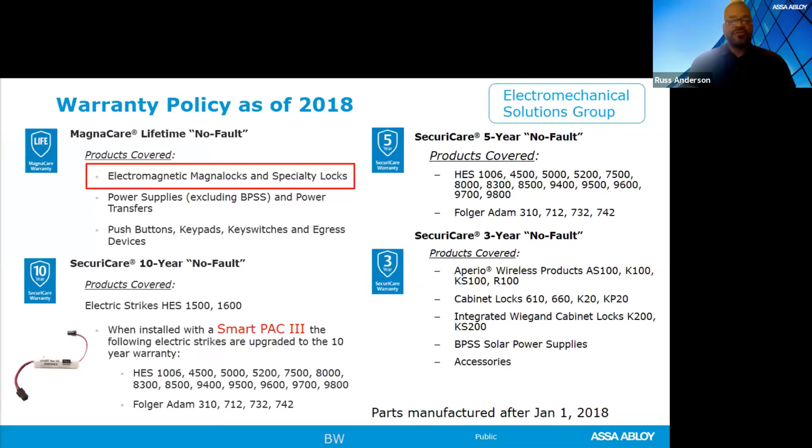So next thing is safety, safety, safety, all right? You have to be safe. Regardless of where you are in this industry - you could be an architect, project manager, technician, it really doesn't matter - you need to do your risk mitigation before you go out to the field or take part in any activity, because you want to make sure that you are going home every day the same way that you came in. So check for falls, check for exposed wires. All these things are very, very important. Now, social distancing - very important to make sure you're safe and smart when you're out and about.

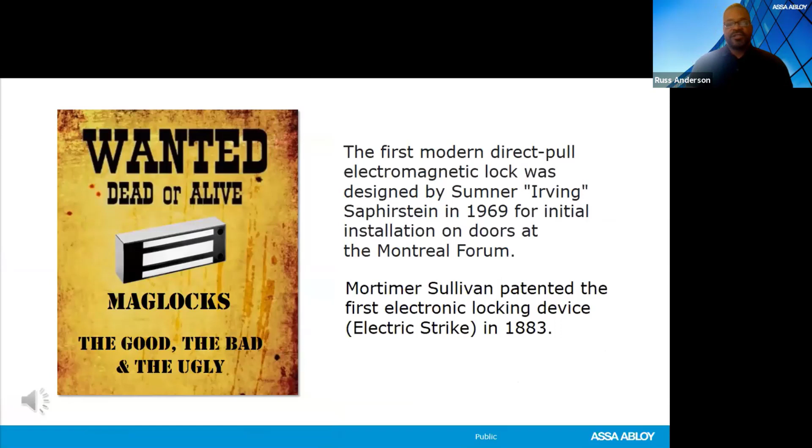All right, so let's go ahead. We've already done some of our housekeeping here. So we're going to talk a little bit about magnetic locks. First things - maglocks have been around a long time. A lot of people don't realize that. They've been around since 1969. A long time. And then it was patented in 1883, the first electric locking device, the electric strike. So access control has been around quite a bit. But the thing about these particular products - if you don't get the training, bad things happen. And that's one of the biggest conflicts with magnetic locks: not getting the training, putting them in the wrong place, not taking the time to put a good quality installation together. So it's so important, okay? So be aware of that. There is training available for you so you can avoid these things, all right?

So today's agenda, what we're going to be talking about - we already did our welcome. We're going to talk a little bit about code because maglocks are very code driven. Some of the maglocks that fit your need, maglock application, then some of the supports that are available to you. So I'm telling you, we've got a power-packed hour. And if you have any questions, please, especially with magnetic locks, populate it in the chat. There are no bad questions, okay? And we want to make sure you are smarter in the next 50 minutes than you are right now. That's our goal. Plus you have a good time.

All right, so let's jump into codes. That's the biggest deal when it comes to magnetic locks, or a lot of the demystification we have to do out in the field when it comes to magnetic locks, right?

People find ambiguity when it comes to building codes, fire codes, electric codes, and life safety codes - which codes are adopted, which codes apply. There's a myth that maglocks are banned unless there's a written amendment or policy in that local municipality that amends the current code. There's nothing that says that. Not in IBC, not in NFPA, not in IFC. You just have to adhere to certain code requirements. Now the AHJ can write a local policy in addition to restrict magnetic lock use, but in the base codes you don't see that kind of thing. We're going to talk a little bit about that.

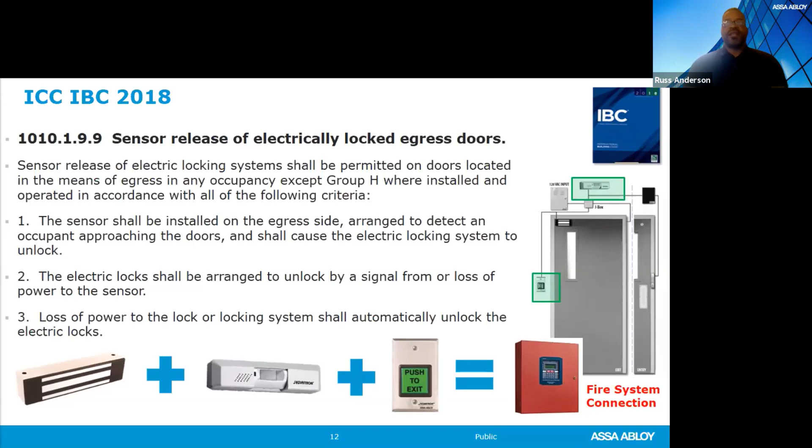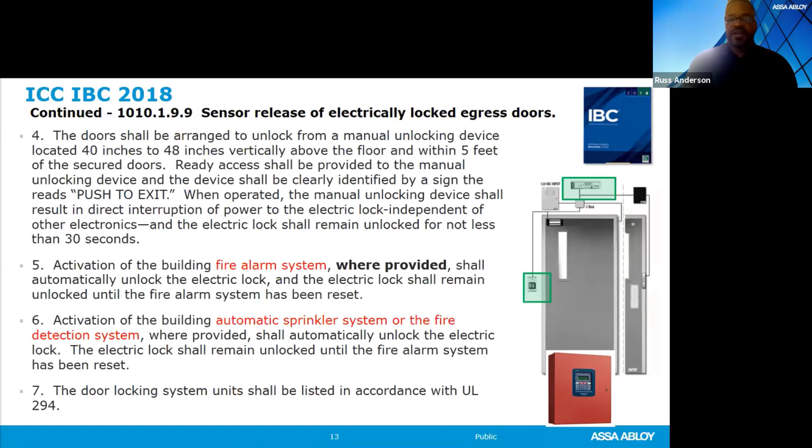Absolutely, you can add a switch to many bars or many of those pre-existing devices, as long as they are able to be electrified to drop power to the Maglock, as long as you fall under that specific code. So just be aware of that.

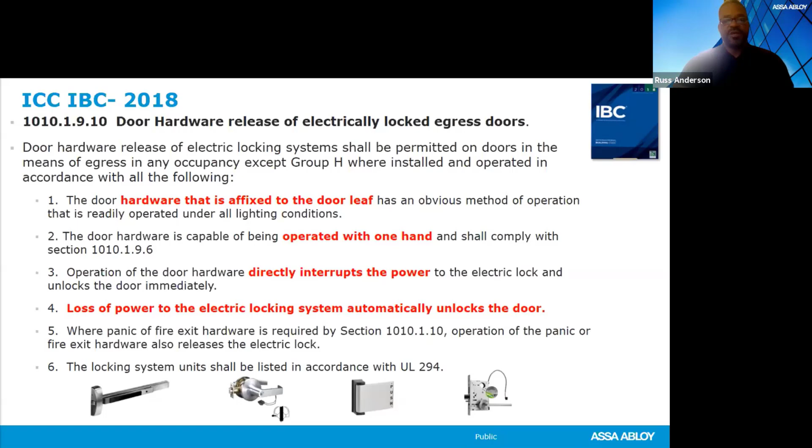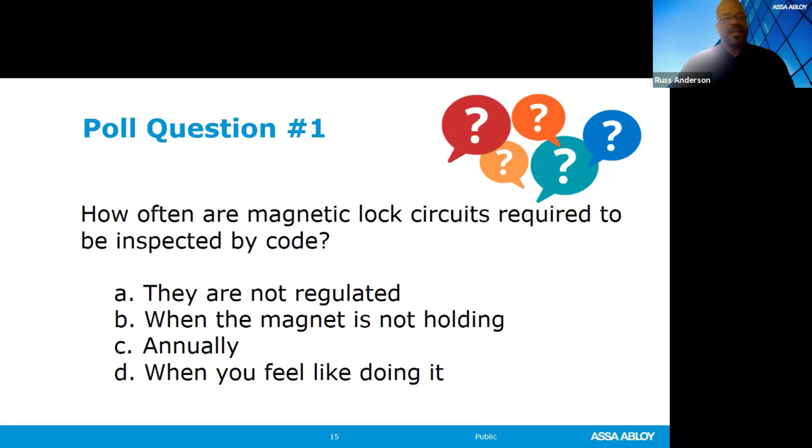Okay, so that's very important to know when you install a magnetic lock. Annually is a very important number to remember. Okay, and that's right out of the code, so we're not making anything up here. All right, so let's keep on going. That's good information, thank you guys for participating, appreciate that, makes my job a lot easier. So let's keep on going here.

And we're going to talk a little bit about some of the maglocks that fit your needs. That's so important to know because we pose these questions all the time. Where should I use a magnetic lock? And most people will say, well, it's the last thing that I choose. Unless there's no other solution, I go with a magnetic lock. Now, there are openings that are inherently a little bit better for magnetic locks versus other solutions, okay?

So we have aluminum storefront. Absolutely can use a magnetic lock, especially those double active leaves. They are very hard to secure, okay? So especially if you want them both actively controlled independently.

Glass openings, another opportunity for our magnetic locks, okay? Some of those places where it's just gonna be difficult, or just maybe your skill level, your technician couldn't core drill that door to get that power. Look at all that glass on some of the bottom doors. You're not going to be, it's going to be difficult. So there are some specialty openings out there where you can use magnetic locks.

So we're going to talk about some of those openings, but it's important to know where and when to use magnetic locks. That's the important thing, okay? Where and when to use magnetic lock, and it's based off certain criteria here. All right, so let's advance here.

First and foremost is holding strength. There are all different types of magnetic locks with different types of holding strengths. We've got from 200 pounds all the way up to 1,800 pounds. That is a lot of holding strength here.

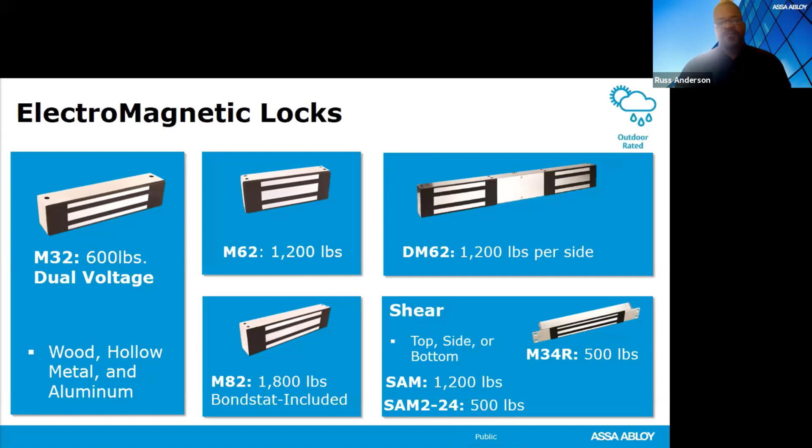And then we have some of our specialty locks, like our shear locks that you can install on top or bottom, and our M34R, a 500 pound recess magnetic lock. So there are a lot of solutions out there, but these are not interchangeable - there are certain solutions for certain magnetic locks. We're going to show you some of these so everybody knows, because we see this a lot: putting a magnetic lock in the wrong opening so it's not doing exactly what it's supposed to, because it's made for a certain solution.

So we also have our bracketed mounted magnetic locks. Some of these magnetic locks can be a little bit heavy, so this makes installation a little bit easier. You install the bracket - there's a lot of adjustability to it, so you can line up your magnetic lock with your strike plate a lot easier. It still has all the same advantages of your direct mounted mag locks.

This one actually has LED door position switches available for in-swing and out-swing doors - perfect for high traffic, high security, fail-safe, delayed egress systems. We're going to talk about delayed egress - that's a very big deal nowadays. So if you want something with a little more flexibility, your bracketed mounted mag locks are definitely the way to go.

Basically, it's a bracket that you put onto the gate - doesn't matter if it's round, square, whatever the case may be. It's boltable and weldable, and you can use the 62FG and work it in conjunction with that, so it works really well. You really want to start thinking about perimeter security - it is an emerging market. Stopping people from getting onto the perimeter of the property versus at the door is a very big deal now, so definitely want to consider those things.

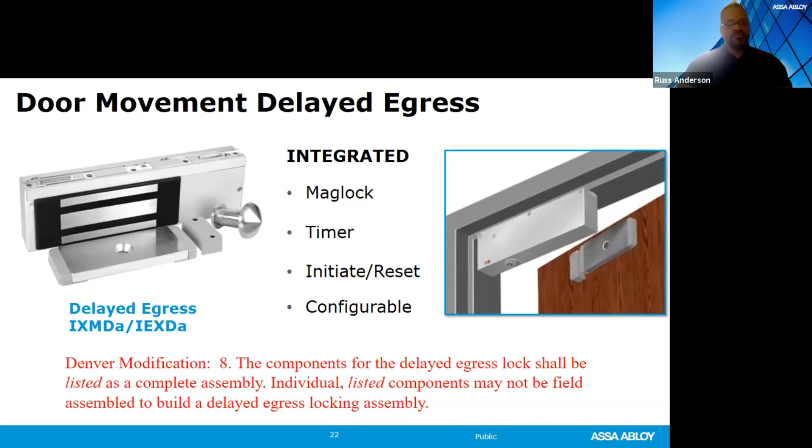But one more delayed egress solution is coming soon. The IXMDa has a bit more of an industrial look, but Assa Abloy takes the time to add aesthetics, a good looking product so it doesn't detract from the opening. So hopefully soon we'll be releasing the DEM 680E Eco Mag.

This is a great, good-looking solution for hospitals, elderly care, and psychiatric detention. Loss prevention is another good place - you're going to see that in retail stores on doors that shouldn't be used, where the customer should be using the main entryway. So if somebody's hitting those back doors, that's not a good thing. With delayed egress, you can put some type of initiate, buzzer, or LED so the asset protection people can come see what's going on with that particular opening. It looks nice, adds aesthetics, doesn't detract from the opening. So it should be coming soon - we'll let you know as soon as it's available.

We also have some additional EcoMag products to talk about. There's a whole line of them - the Securitron M680E BD, and a whole bunch of different acronyms. I won't go into all of it, but the cool thing is these magnetic locks, when the door is propped open, the magnetic lock drops down to almost 20 milliamps, so it's not using the same amount of power. Typically most mag locks are about 300 milliamps worth of power. It's a huge savings when you're able to have the magnetic lock go to sleep until it's needed.

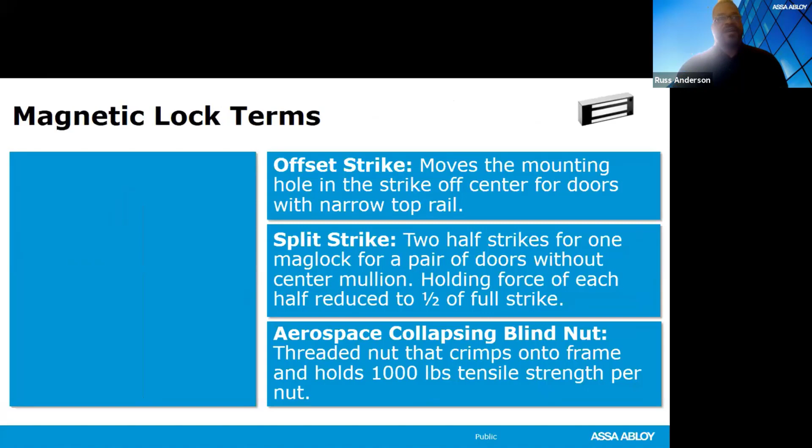Okay, so some of the other additional things when it comes to magnetic locks. Some of the terms associated with them: offset strikes. That moves the mounting holes off center so you can basically make it up in a more appropriate manner when you're dealing with those weird frames and doors.

You also have the split strike, so if you want to control a pair of doors with one magnetic lock. That's a very common thing out there. You can put a 1,200 pound mag lock in the middle of the door, especially ones without the mullion in it, and you're able to control those leafs. You just release both of them at the same time.

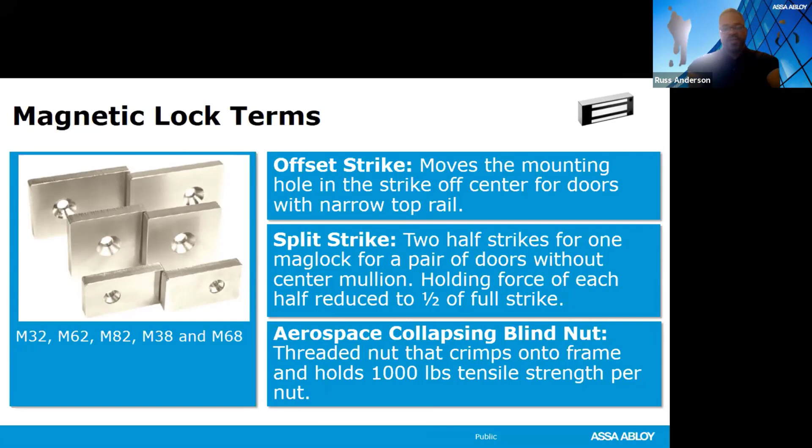And then there's something unique to us, the aerospace collapsing blind nut, okay? Threaded, crimped into the frame, 1,000 pounds of tensile strength per nut. Okay, that's a big deal.

And a lot of our competitors use self-tapping screws. Be aware of that. Those magnetic locks typically are taking an impact because you'll be surprised how many people are using the magnetic lock as a door stop. It hits that magnetic lock with that self-tapping screw, it's going to come out. You just don't want that phone call: hey, a magnetic lock came out of the frame and hit little Johnny on the head.

So you don't have to worry about this with these. It's 1,000 pounds at each attachment point. That's huge, you can hang from it and it's not going anywhere. So absolutely, you can get a bag of these. They come with all of our Securitron magnetic locks. Use them on any type of install, it's definitely going to help you out.

All right. There you go. Thank you, Roger.

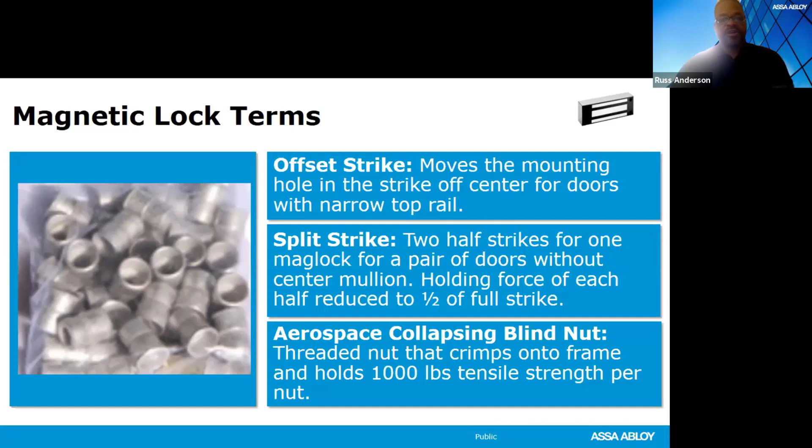All right, BondStat, we said we're going to talk about this here. So it basically notifies your access control system or your alarm system that your door has accurately secured. So when it's completely mated, you don't have any problems.

You've got the armature plate here, completely mated with these strips here, and you're good to go. But if it goes cockeyed or off center, it has a normally open contact to let you know there's something going on with the door. So absolutely, let me know, okay?

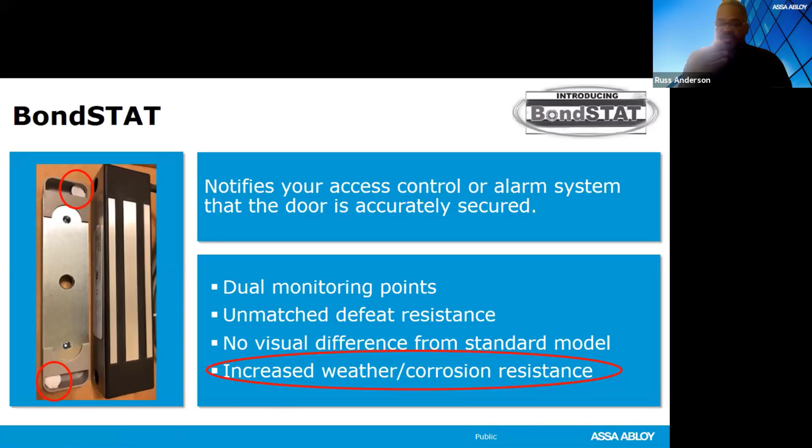Increased weather resistance, corrosion proof, it has a film sprayed on it. There's really no reason why a Securitron mag lock should not last 20 years easy. Just got to maintain it, keep it clean, and you're good to go.

And then we have a couple of other additional features. Again, you have to go back to code. The SB-MXD initiate device allows you to initiate any signal for delayed egress. So if you already got a magnetic lock on the door, you've got a push device or dual sense bar or something like that with a switch in it, and activate that initiate. Just be aware, make sure you're able to use multiple different components in your particular city or municipality, or if it requires that one all-in-one component.

Then we have the energy absorbing bolt, okay? Because again, you hear that click. It absorbs that impact, thank you Roger, appreciate that. Absorbs that impact so it extends the life of that solution. Very easy product to install, you definitely want to put these on all magnetically locked doors.

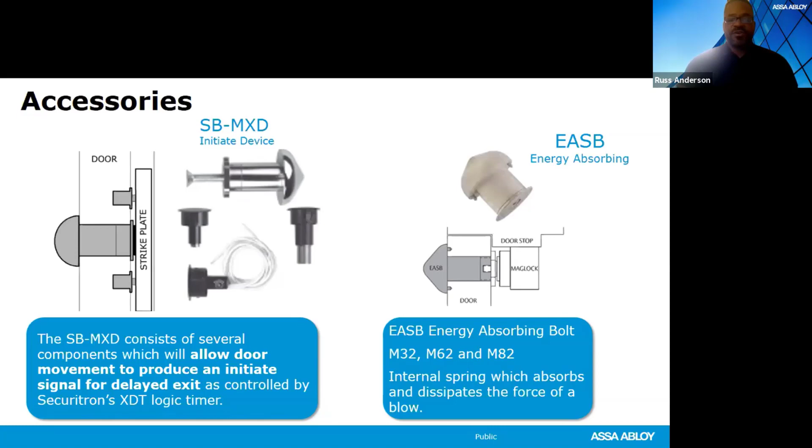All right, so if you've not installed a magnetic lock and you don't know what tools you need, this is the box for you. It's called the IK Installation Kit. It has everything you need to install your magnetic lock: drill guides, blind nuts, washers, everything you could possibly need. Plus, it even has the cool cocking tool that you can just drill the hole and pop, and then you are able to put your blind nut in. It's a lot easier than using the crescent wrench and a box wrench and having it collapse down. So that's definitely a recommendation for me to you to get that tool. You can get that from us.

And then here's some of the solutions for magnetic locks. Glass doors. Anybody done a glass door yet? Done access control on a glass door? Go ahead and raise your hand if you've done that.

I know Roger has, right? Okay, Kevin, okay. So there's a few of you out there.

Glass doors are not going anywhere, I can tell you that right now. They're gonna get more sophisticated, more intelligent, and they're gonna say, hey, just leave it to the door guys to figure out how to secure this. So we've got solutions, and magnetic locks are inherently a good solution for all glass openings.

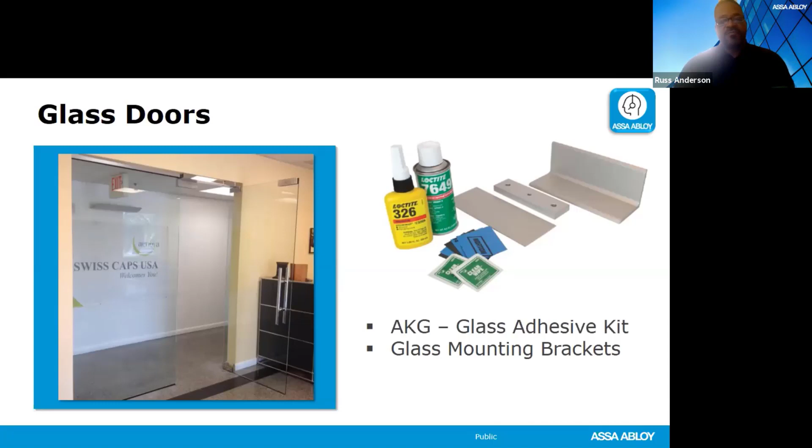But let's talk about some of the other frames that are out there, and why it's important to do that site survey. That's because there can be multiple different types of openings in your building, and in each one of those openings could be aluminum storefront, could be 18 gauge knockdown frame, could be glass, could be wood. There's different mounting brackets for magnetic locks depending on what type of frame you're dealing with. So that's very, very important to take a good look at that.

You need to have that 2.5 inches of flat mounting space to ensure that your magnetic lock is anchored correctly. If your magnetic lock is not anchored correctly, there's a possibility for liability. So we want to make sure you have this information.

Katie just populated it into the chat, that's a nice little cheat sheet. If you're looking at aluminum storefront, hollow metal, concrete, all the different frames that are out there, we've got a nice little cheat sheet. So click that link, download that to your electronic device. I'm telling you, it's going to save you some heartache.

And this leads us to our next polling question here. What percentage of technicians go out to the job site without the correct mounting brackets? You'll be surprised, this is our own poll. So what do you think? How often do you think that happens?

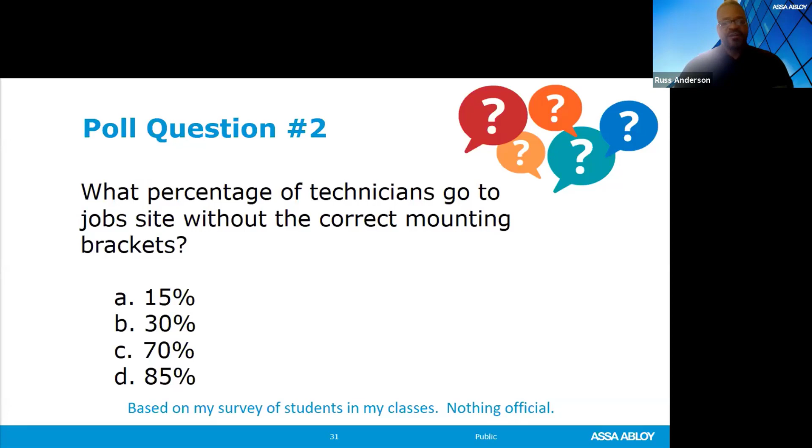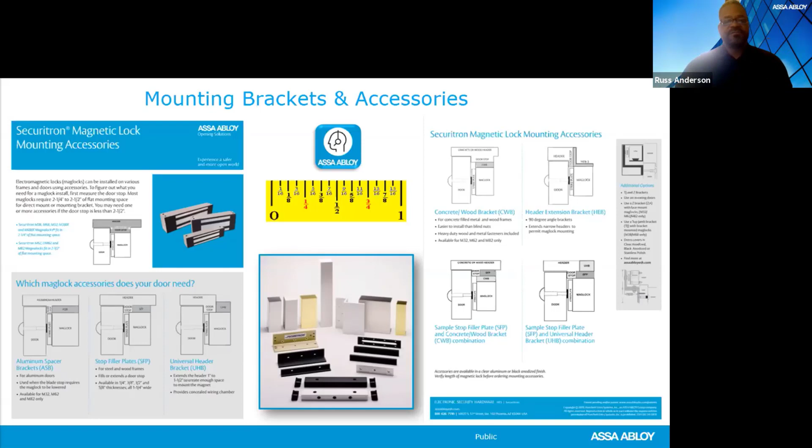Again, like we said, 2.5 inches of flat mounting space is so important for proper anchoring. But then there are some frames out there where you're just not going to be able to create that 2.5 inches of flat mounting space. So your TJ bracket and your Z bracket is a go-to. You can face mount your magnetic lock if it's bracketed, absolutely no problem, or you can do a direct mounted mag lock on the secure side of your door.

It's not the most attractive install, but it works, and you'd be surprised how often you can go to this. I've seen this on multiple different solutions. So you can always go with that TJ bracket or Z bracket, all right?

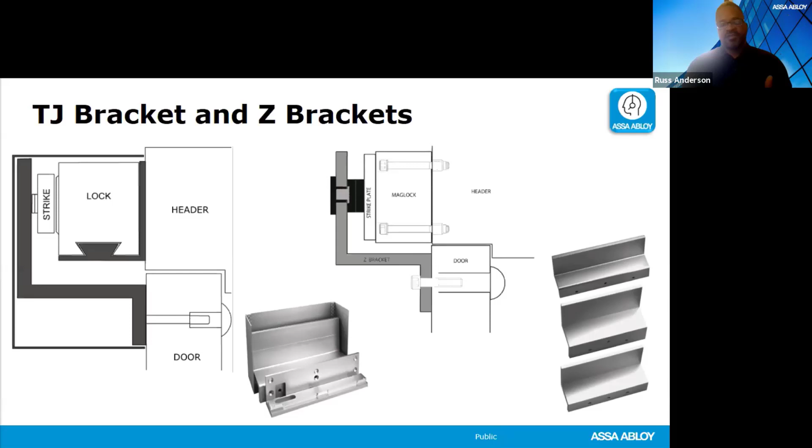All right, let's take a look at some of the magnetic lock applications. The important thing to consider when you're looking at application is you want to find the right solution for your opening. Consider function, codes, surroundings, existing conditions, and some of the restrictions you may have to adhere to, like code or when you're actually able to do the installation.

So pay attention to the opening, the frame type, existing hardware that's already on the opening, that's an important thing to consider, and then familiarity with the electronic hardware options. Know that there may be more than one solution available to you, so that's why that site survey is so important.

Remember, access control is only a part of your layered security. There's CCTV, there's other security systems as well. So remember that as you're talking to the customer. You want to know what's existing already on the door, and note that - that is very, very important.

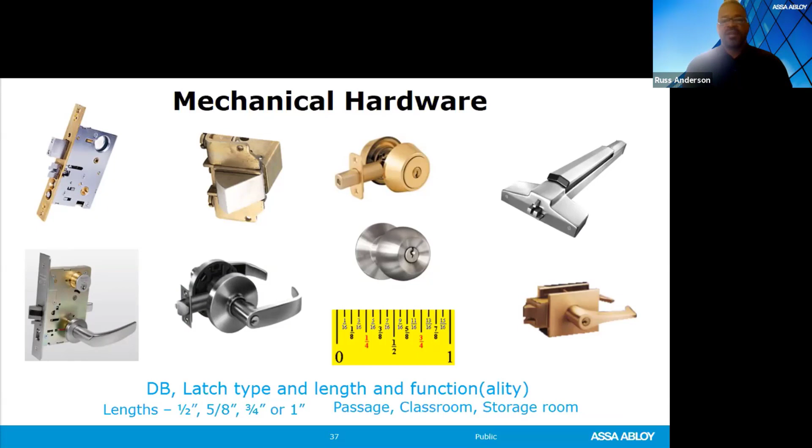It's always good, as Roger tells you, to have some type of latching even with magnetic locks. So be aware of how that's gonna work together. When you're looking at aluminum storefront, there's all different types of hardware out there - dead latches, Pullman latches, star wheels, deadbolts, hook bolts, rim exit devices.

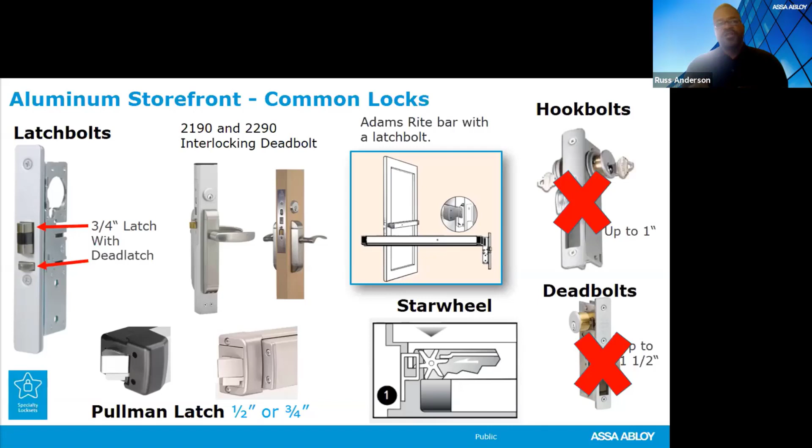Just kind of know how everything is gonna work. You may have to dog some things down or disable those things in order for your magnetic lock to work effectively, or maybe you're gonna work it in conjunction with that magnetic lock. So maybe on the Pullman latch, if you fall under 2009 plus codes, you can put a switch in your Pullman latch - hit the door, drop power to your magnetic lock, kind of thing.

Also vertical rod latching, that's an important thing to consider, especially the latching points. Is it a Pullman latch up at the top? Is it the ball, or the turn kind that you see out there? You may have to disable that bar, or maybe there's retrofits to electrify it. So be aware of those things.

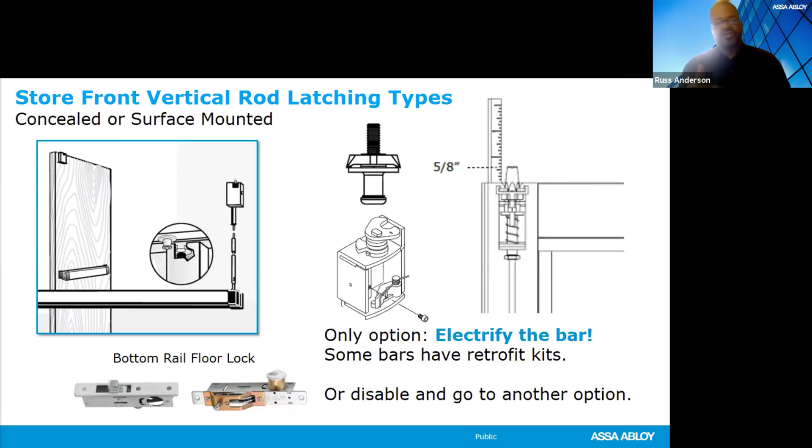You've again taken a good look at the openings before you make an informed recommendation - that is paramount to giving the right solution to the right opening. All right, so let's take a look at this particular opening here.

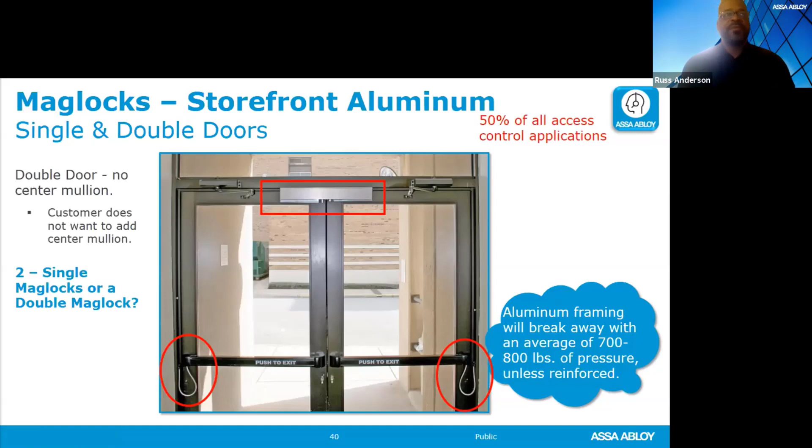Maybe the customer doesn't want a mullion in the middle. How about single or double magnetic locks? Again, it goes to what the customer wants. Does he just want both doors to swing freely at the same time, or does he want to control them independently? That's going to definitely tell you how many magnetic locks you're going to be using.

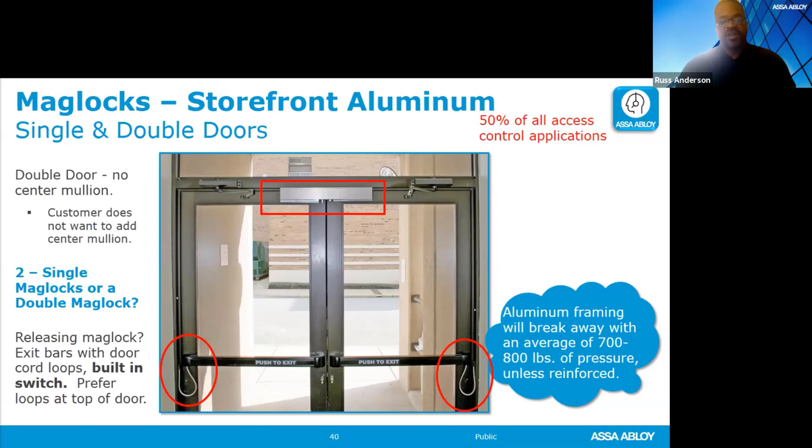Hopefully this is under 2009 plus code because it has an exit bar tied to the magnetic lock. Otherwise, I'm looking for a motion sensor or push to exit button. You definitely want to be aware of code, and you want to be aware of quality.

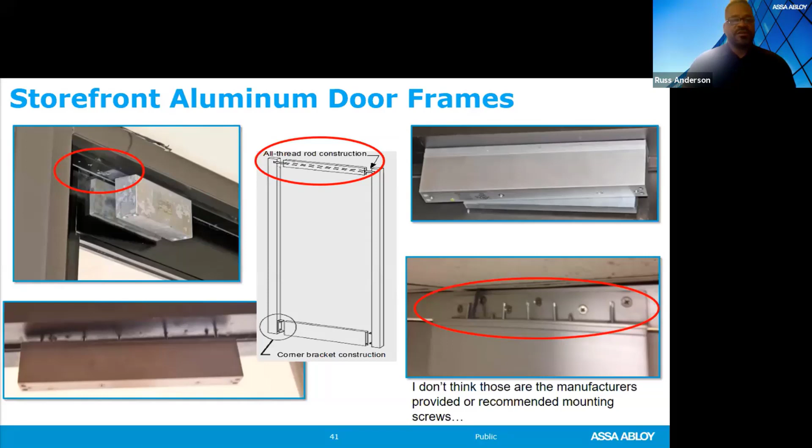Getting training on proper magnetic lock installation is so important. We also have videos for magnetic locks throughout YouTube, so educate yourself when it comes to that type of thing.

All glass openings, magnetic locks. First thing you want to do during your site survey is check if there's a header or no header. If there's a header, it makes life a little bit easier. If there's no header, we got to start thinking a little more critically, possibly thinking about gluing brackets onto the glass.

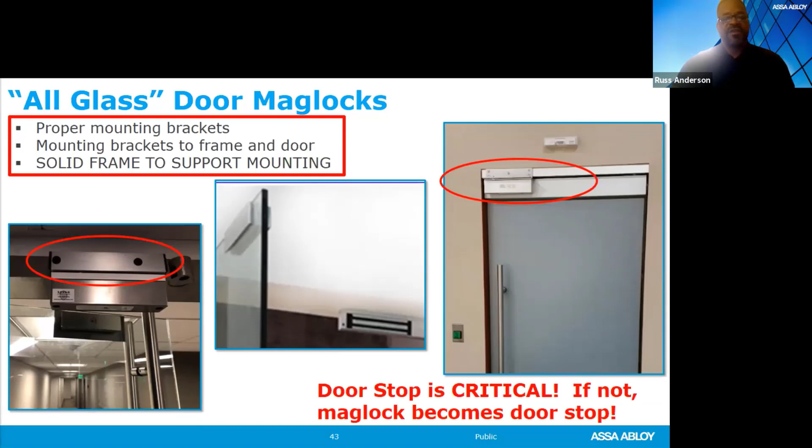Here's some examples of all glass doors mounting. Solid frames, you want to support the mounting, that's very important, anchoring is so important. Again, do not use your magnetic lock as a door stop. There are door stops that you can buy. Don't use your magnetic lock as a door stop because eventually it's going to come out of the frame. Be aware of that.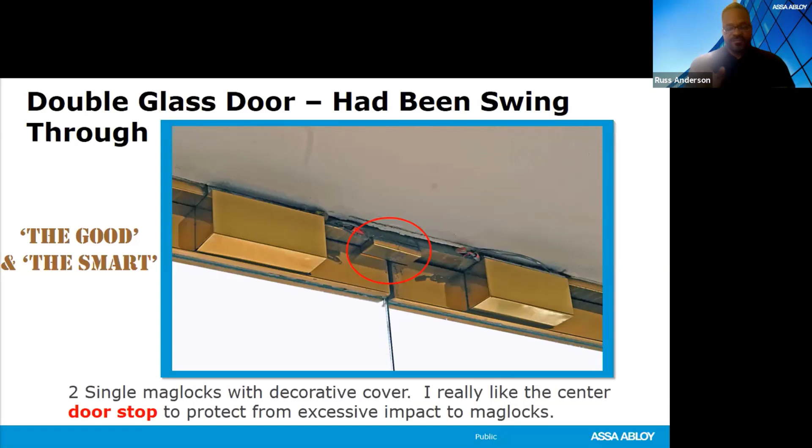This is one I kind of like, this is a good looking install. They went with the brass dress covers that are available, and then they have the door stop in the middle. Good looking install, good and smart, right? So it works very well.

Then we have other applications, like our shear magnetic lock here, low security for this one, wood frames for those small hard to fit openings. You can use those shear locks, just use our tech support if you have any questions on the use of this one. It's a very small magnetic lock, 600 pounds, interior opening type of thing, really good for those hard to fit openings.

Here is an incorrect install for a shear lock. These are swing through doors, and we see people try these all the time because they just don't know what to use. In the beginning this might work, but due to door use and door sag, you're just asking for trouble. You'll have to go out to these doors and adjust them if you're going to go with this solution. There are other solutions for this.

Again, like you saw in the previous slide, a door stop with the magnetic lock on each side is probably the one you want to go with on this. It won't be a swing through door, make sure it just goes in path of egress, but you have to have that conversation with your customer when it comes to those types of things.

Here's an example of shear magnetic lock installs. They use two screws for your tab kit to make sure it's installed and secure. Perfect, I like that, that's a good way of being able to do that. But here's another one here with the elevators, you're starting to see that type of thing now.

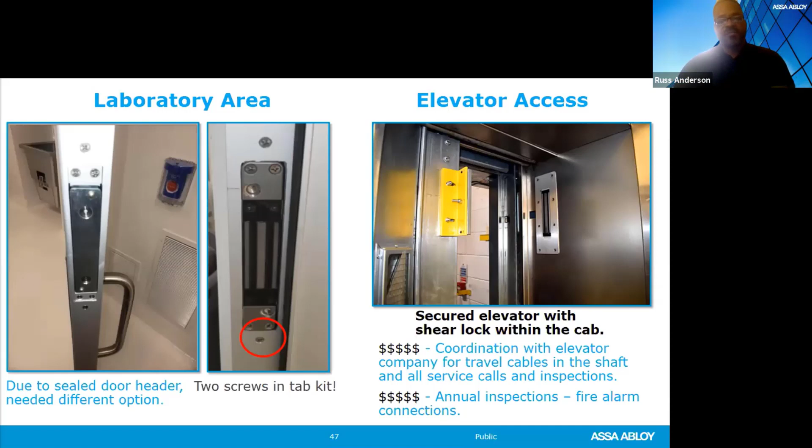You're starting to see magnetic locks used in a lot of different unique places here—reverse mounted, like that Z bracket, that TJ bracket, for warehouse, industrial looks. It works, it's just not that attractive. Alarm Controls has a nice cover you can use on it, a little more aesthetically pleasing, but it definitely works. Now let's take a look at this one here.

There may be some problem. There's a magnetic lock on this door here, a fitness center, with a motion sensor, 30-second timer. I think that's a motion sensor, but I'm looking for that 30-second timer here. Make sure you are adhering to code, especially with magnetic locks. We see a lot of examples of that.

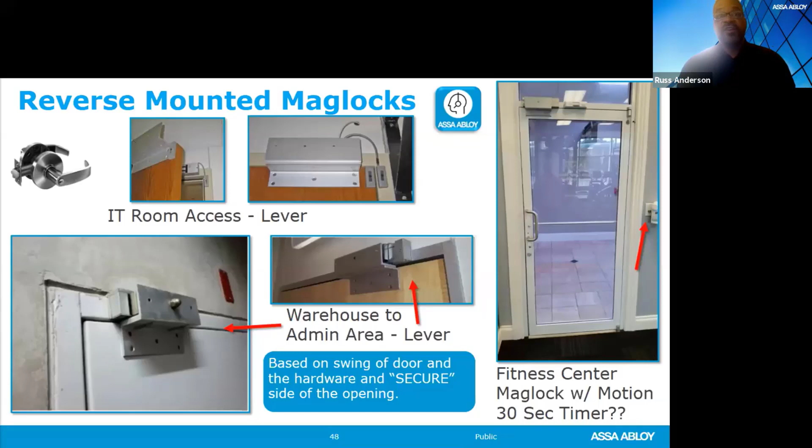Make sure there's a variance. So you walk up to a door that isn't code compliant—make sure there's a variance somewhere, or ask the customer about it. If it's not correct and they can't justify or show you documentation on why the door is the way it is, you may want to run away from it screaming. I'm telling you that right now. There could definitely be problems.

Again, fence and gates and outdoor rating, that's a big deal. Our direct mounted mag locks are 32, 62, 82—outdoor rated magnetic locks. So make sure if you're using something, even on an exterior door, it is outdoor rated, meaning it can stand up to that weather.

Like we were saying before, we've got FMKs that can affix to all these different types of gates and fences. Make sure if you're getting into perimeter security that you're using the right cable, burying the right cable, so you don't have any issues with that. Use a protective collar as needed as well, so people can't reach in or use a string to pull on a ring magnetic device and drop power to your magnetic lock. So think about that.

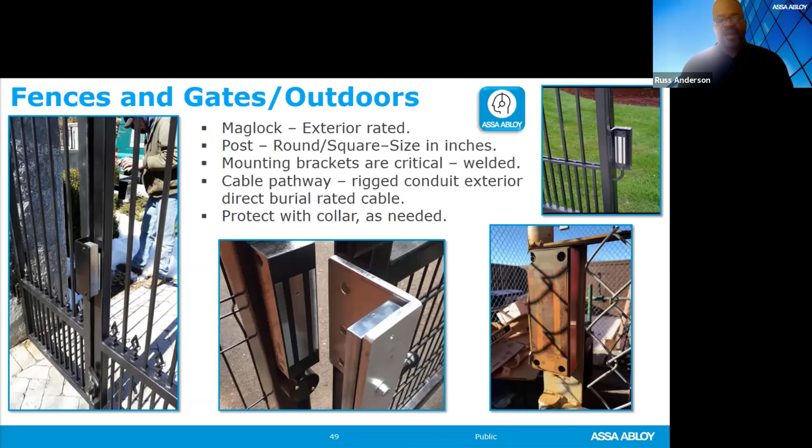Here's another picture here. On an exterior door, water was getting to it—definitely not an outdoor rated product—and it started to rust. So make sure it should say outdoor rating on it. We have icons on all of our products here that say outdoor rating. That's an important thing on exterior doors and anything you're going to be using outside—it's so important.

So let's see here, what are some things we need to consider? First and foremost, code—do my site survey, where's this door going, what code applies? That's what we're looking at with a critical eye. Some of the solutions, maybe electrify the bar. What's the skill set of the technician? What's surrounding—is that cinder block, is that drywall? How am I going to get wired down to those solutions? That's an important thing.

All right, magnetic lock—it's not fire rated, so what are we going to do with the vertical rods? Are we going to remove them? Are we going to disable them? These are questions. Existing bars can have a switch to it depending on what code you fall under. So, power to that magnetic lock—should we use one magnetic lock or two single 600-pound magnetic locks? These are very important things to consider.

And again, having that conversation with your customer is so important. Do not try and specify access control over the phone. We see people do it all the time, and then there's problems—and guess who gets those problems? The technician, when they're out there doing that install.

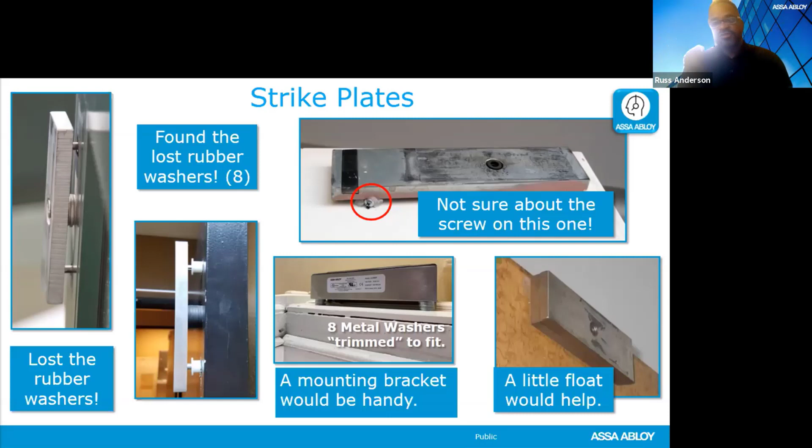Again, these are real pictures from openings in the field, we're not making this stuff up. This goes on all the time because people don't take time. Read the instructions out there.

All right, so we got some more openings here, all different types. Double active leaf is a great place for magnetic locks. So you see what looks like an M680 on your double active leaf doors in your top left, and then at the bottom left. But still, we need to make sure we're adhering to the code.

Take a look at that magnetic lock on that door in the center. That's kind of low. So be aware of that. That could be a problem there.

And then delayed egress, making sure that we meet code is so important. That's why we're going to give you that resource, that little icon that's going to help you out.

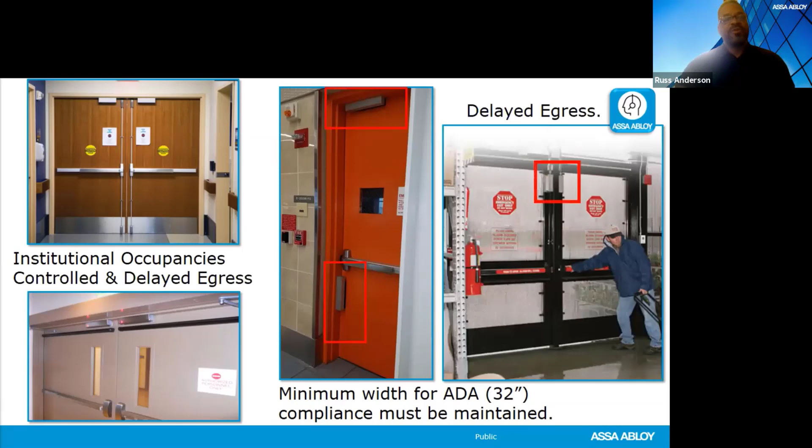All right, so inspections, like we're saying, right out of NFPA 101. And remember, if you have any code questions, you can look them up for yourself. ICCSafe.org is one place, and then you can go to NFPA 101, Chapter 7, which talks about the installation, what you can and can't do. So be aware of that. It's available to you online.

So here's the inspection of the door, right out of NFPA 101, door hardware release, electrically locked door assemblies, door assemblies with special locking arrangement. It says annually, so we're not making this stuff up, annually, right out of the code, 7.2.1 and the rest of the numbers. So be aware of that.

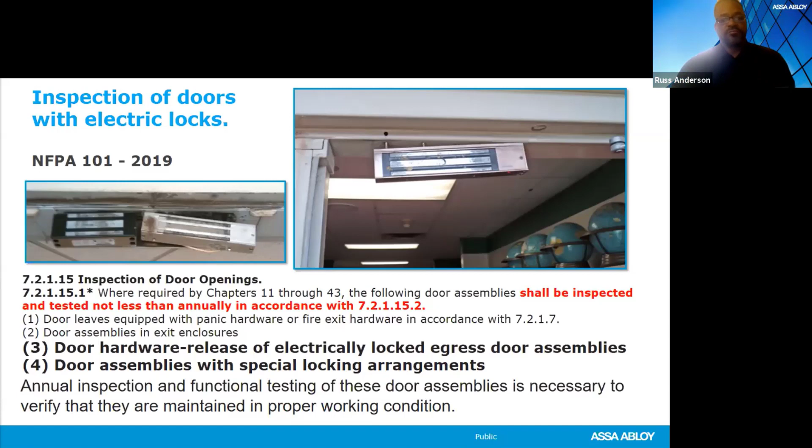All right, let's take a look at another opening here. So we got our double active leaf doors, we got a single magnetic lock on each door. Again, this is probably going to have to be 2009 plus code because it has what looks like a dual sense bar on it. And you got your cords on your side. Again, we're going to recommend to put those cords up at the top, but it's a very common thing to see them on the sides.

Also, another recommendation with those armor door cables, Alarm Controls has a very good die cast, made out of metal versus plastic, door cord loops. A little bit more beefy, it can take a lot more abuse, last a lot longer. So take advantage of those differences.

So let's take a look at our magnetic lock selection checklist here as we're kind of wrapping this thing up. First thing we want to do is understand the security level. Know the mounting conditions, what brackets do I need, what materials am I dealing with. Determine codes and ratings of those openings. Know the skill level and what tools you need. And then always ask questions, that's an important thing. And then that Assa Abloy support that's available to you.

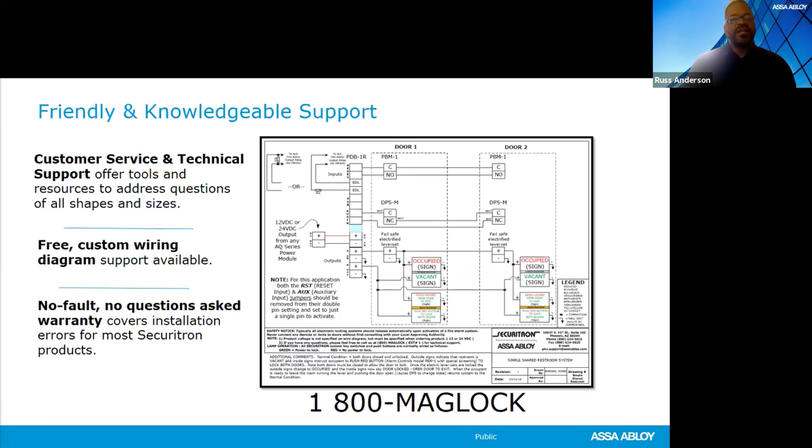You got myself, you got Katie, you got Roger, you got Ruben. You can go 1-800-MAGLOCK. We got those great warranties, Assa Abloy Academy, Google those guys, there's another resource available to you. You can take additional online courses that are absolutely free, that's the magic word, free to you. It doesn't cost you a thing, just a little bit of time, and you get yourself a little bit smarter.

And then those resources, built, B-I-L-T, if you have not installed one of our solutions, we have over 95 solutions in BILT. You just type in the product and it gives you step-by-step graphic 360-degree rotation like you're at the door, installation instructions.

And then the award winner here, the Assa Abloy customer support app. Absolutely download this to your phone. If you ever have any questions at all, use the Assa Abloy customer support app. You can chat with us, you can live stream with us. It turns on your camera and you can show us the door, whatever problem you're having, or you need a recommendation for a solution, absolutely use this, absolutely free. Take advantage of that, nobody in the industry has this.

And it's right to our tech support that's in Phoenix. We're not outsourcing to some other place, it's in Phoenix, you're talking to an American when you're talking to our products in Phoenix, Arizona. So take advantage of that. Download that, it's on Android and Apple. So definitely use that resource.